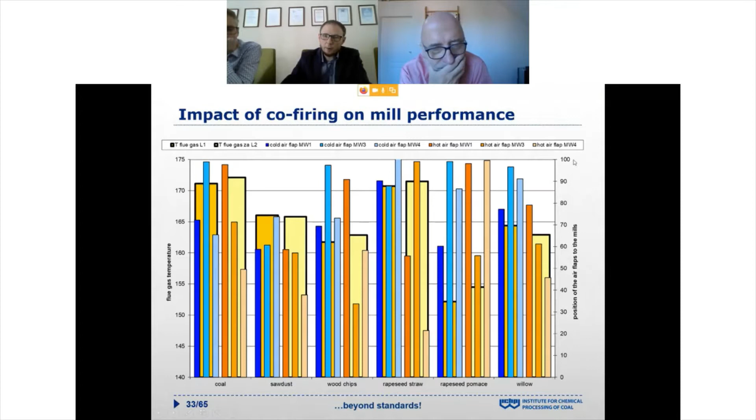We consider the first parameter, the flue gas temperature. The blue one is the opening of the cold air flap, which can be opened 100% or closed at 0%. We also consider the opening of the hot air flap. In the overall meaning, we can consider the total opening of the air flaps.

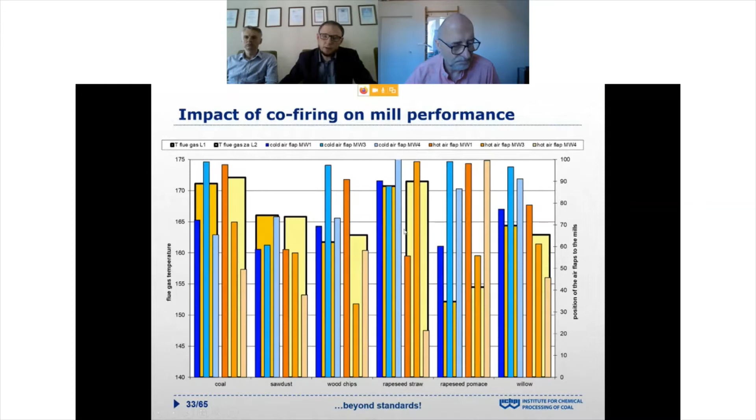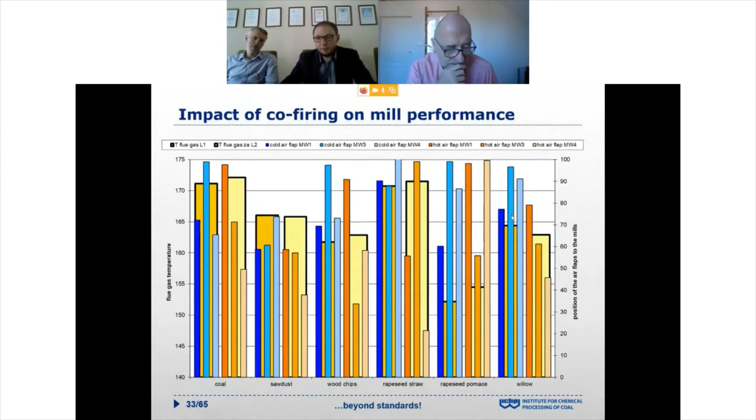Here we have different cases: this is coal, and this is co-combustion of coal with biomass at the same share level, 15%. If we consider the overall total air flap opening, we notice that in case of biomass co-firing, we have to open the cold air flap more due to safety issues, because the biomass explosion probability is higher compared to coal.

So we have to open the cold air flaps more due to safety issues, to avoid increasing the temperature inside the mill. But another point is we have to increase the total airflow rate. Why? Because if we mill raw biomass, bigger particles can still exist inside the mill, so we have to increase the air velocity a little to remove such bigger particles from the mill.

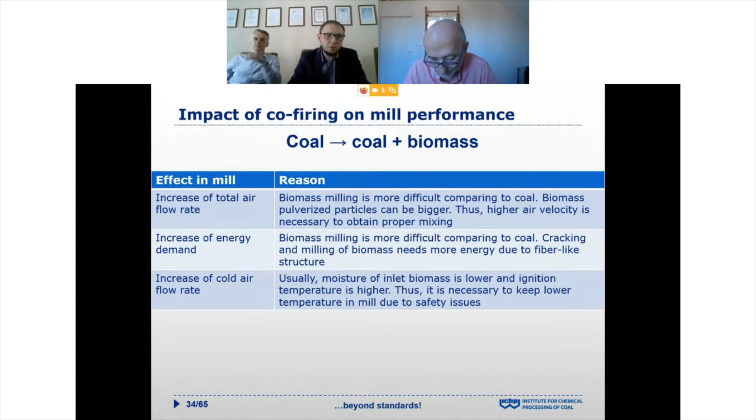Another bottleneck related to mill performance is the increasing energy demand, because biomass has a fiber-like structure. So if we want to mill the biomass, we have to put in more energy. Let me show you some numbers and comparisons between particle size distribution and energy demand.

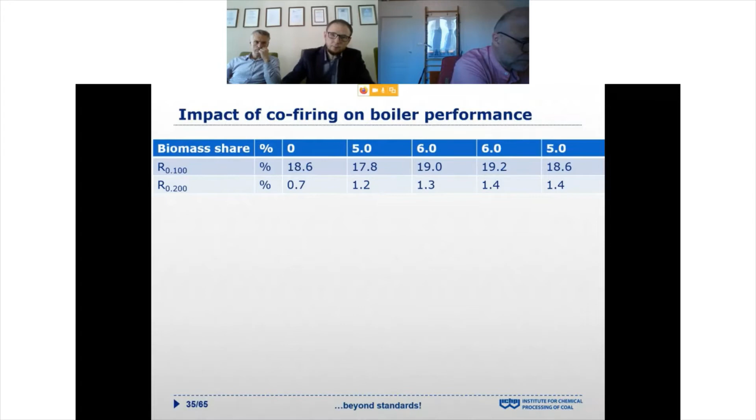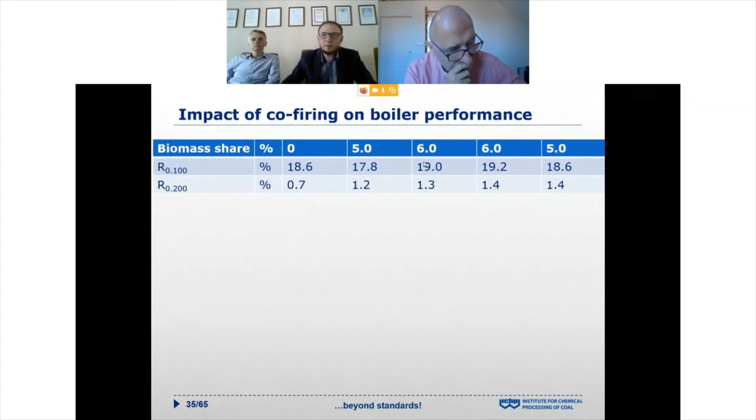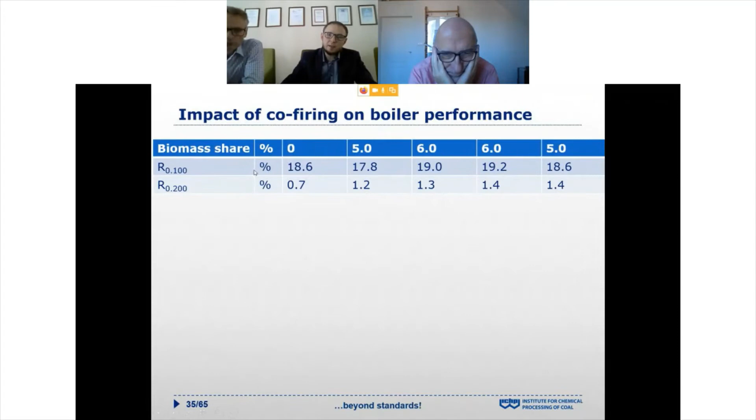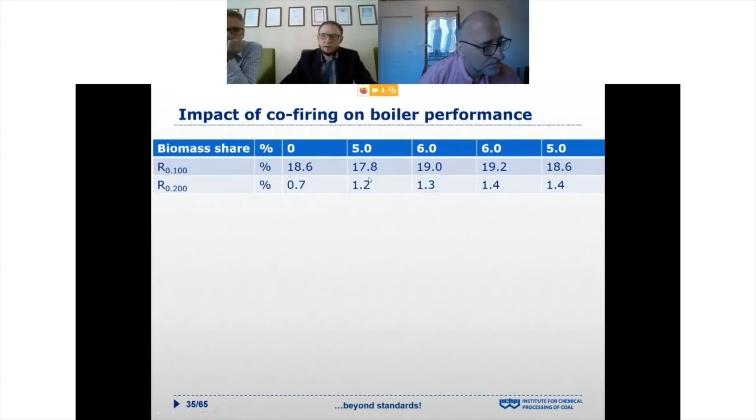Here is the table showing the biomass share. Zero means we mill only coal, and here the biomass share is not very high, it's 6%. You can see that if we increase the biomass share, we get more bigger particles. R0.1 means the percent of particles above 100 micrometers and above 200 micrometers. So the conclusion is that introducing biomass into the mill increases the number of bigger particles in the pulverized fuel. But what about the energy demand?

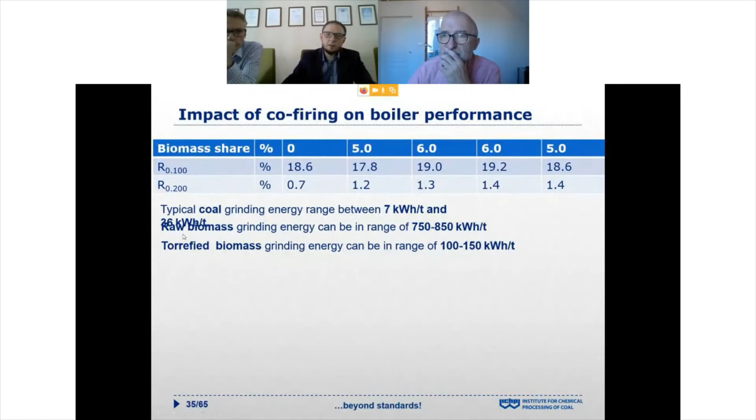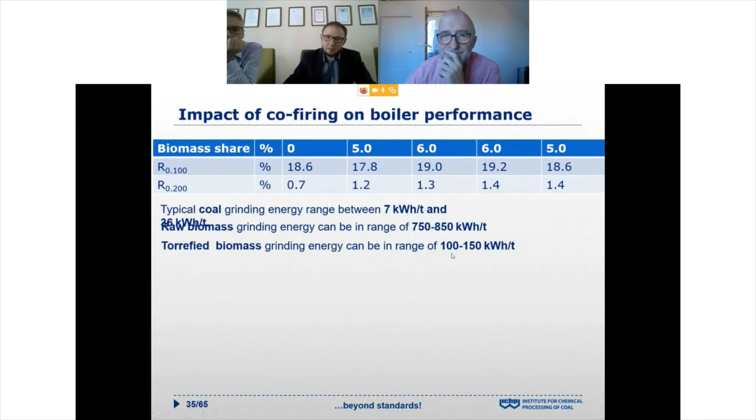This is the comparison between the energy demand of coal, raw biomass, and torrefied biomass. The energy necessary for grinding a typical coal is between 7 to 36 kilowatt-hours per ton. For raw biomass, it's even 100 times more. For torrefied biomass it is less, but we still need more energy.

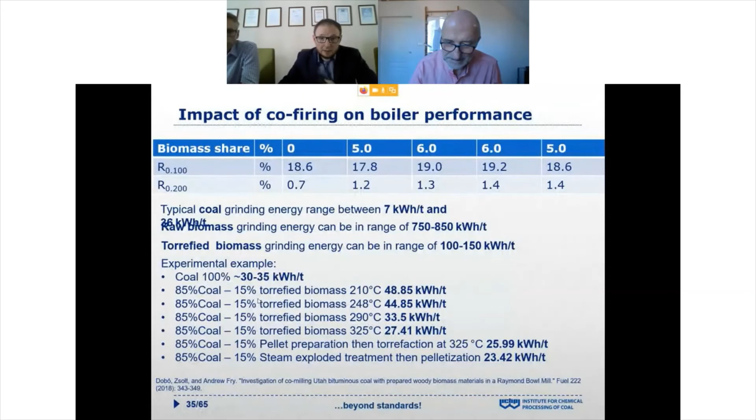If we consider co-milling biomass with coal, the baseline for coal in such experiments taken from the literature is between 30 to 35. If we mix coal with torrefied biomass, it depends on the torrefaction temperature. If the torrefaction temperature is quite low, the energy demand for milling is higher.

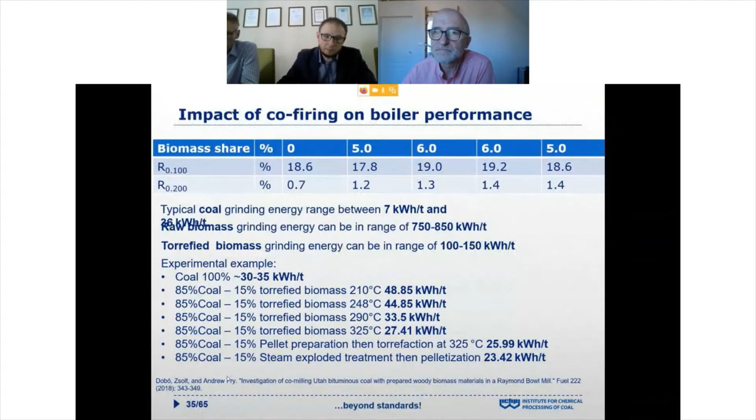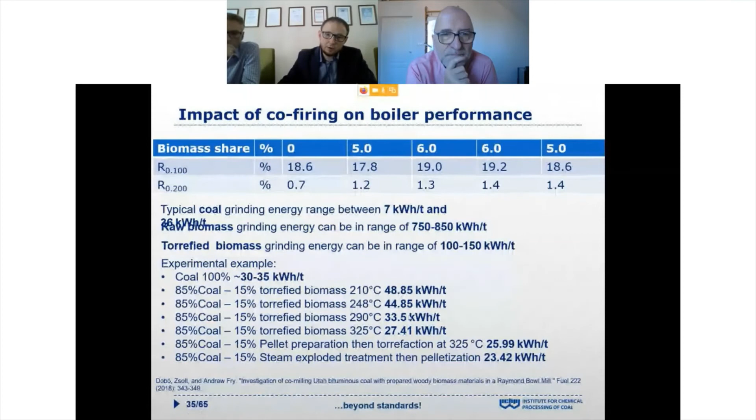In my opinion, the very interesting comparison is the energy demand when steam-explosion treated biomass is introduced compared with torrefied biomass. You can see the energy demand is much lower compared to the previous baseline of lower torrefaction temperature.

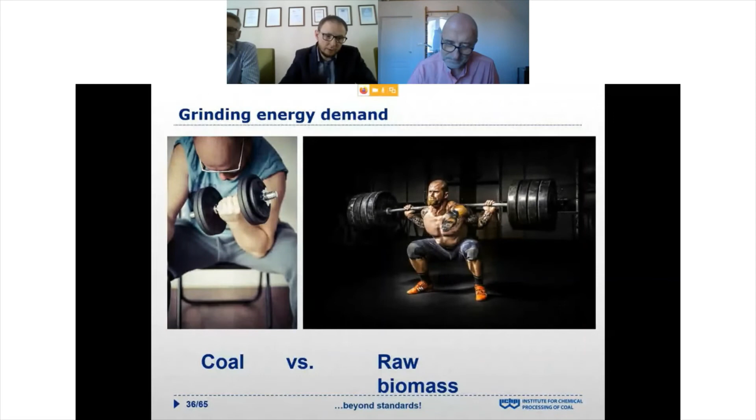For your imagination, the grinding energy demand for coal is much lower compared to raw biomass. Of course milling raw biomass is still possible, we can even change the type of mill. Nevertheless, the energy demand for raw biomass milling is much higher compared to coal milling, so we identify this as a serious bottleneck.

Now let's move from milling into the boiler and boiler parameters, and try to identify the bottlenecks in the boiler. Of course, it's very important to underscore one crucial bottleneck related to ash-related issues, because the composition of paddy straw, especially its chloride content and sodium-potassium content, is high, so the probability of slagging and fouling is very high.

But that's not the only issue, we can also identify another bottleneck: the parameters of steam. If we consider the parameters of live steam and reheated steam, you can see the violet and orange lines, and the water injection to the live steam and the water injection for the reheated steam.

You can see here, as before, different cases. First is the baseline when only coal is applied, and the second, third and next are co-firing of coal with biomass at a specific share, 15%. This number represents the capacity of the boiler in tons of steam per hour, from lower to higher capacity.

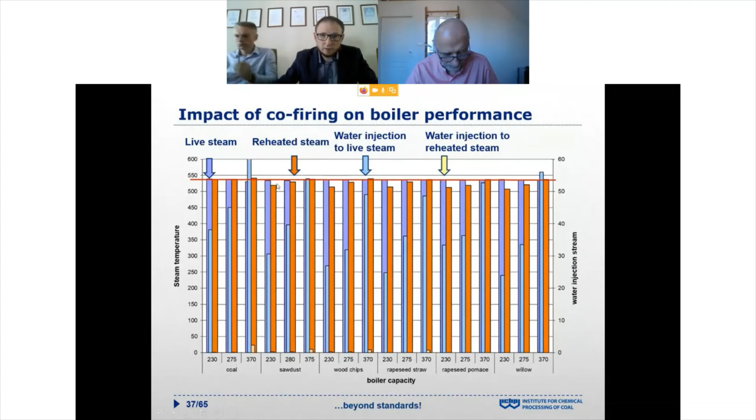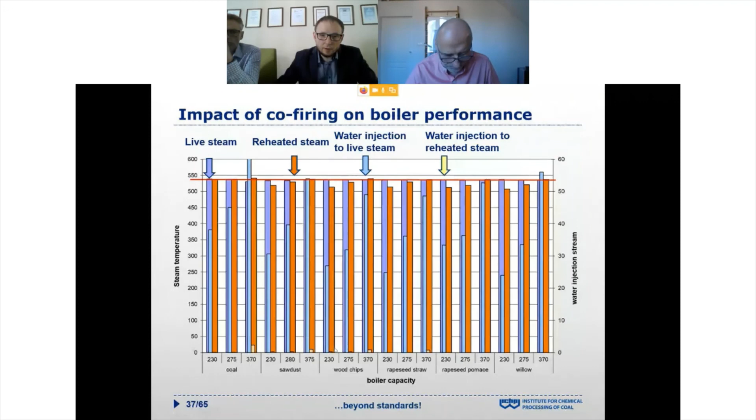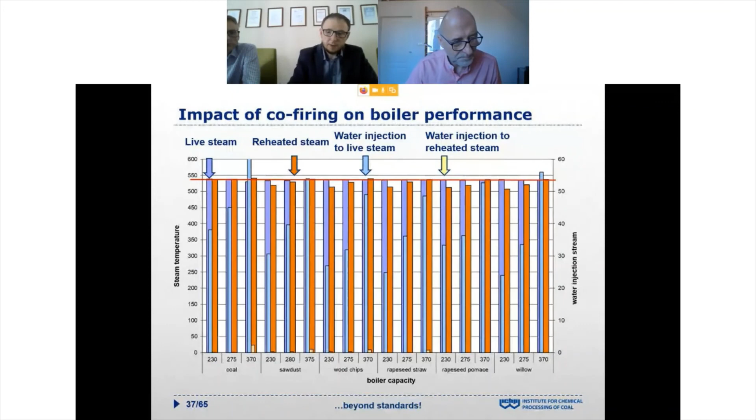Sometimes in engineering jargon we call it the slide of the boiler, we cannot have full control of the steam parameters. Of course, the steam parameters relate to the efficiency of the boiler and the efficiency of producing.